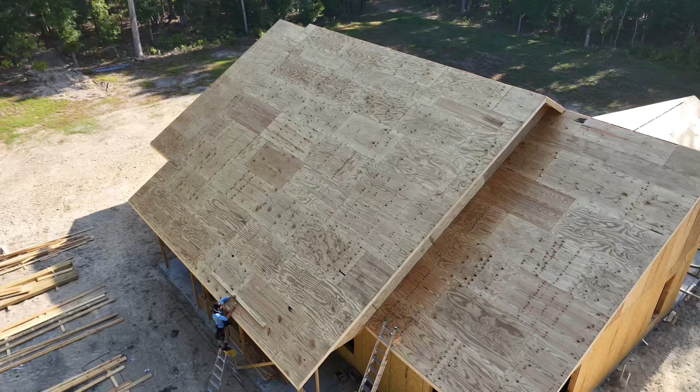So we're framing up this custom home I'm building in High Springs, Florida, and the house is about 3,400 square feet total. And it's a real country style home, which will fit in real well. We're building this house in River Rise subdivision in High Springs. There's a lot of other similarly styled homes in the neighborhood.

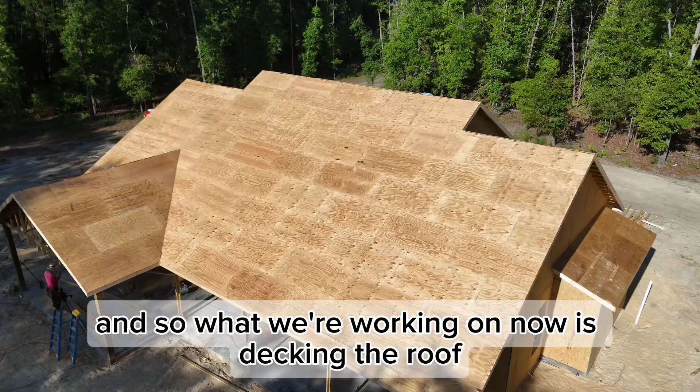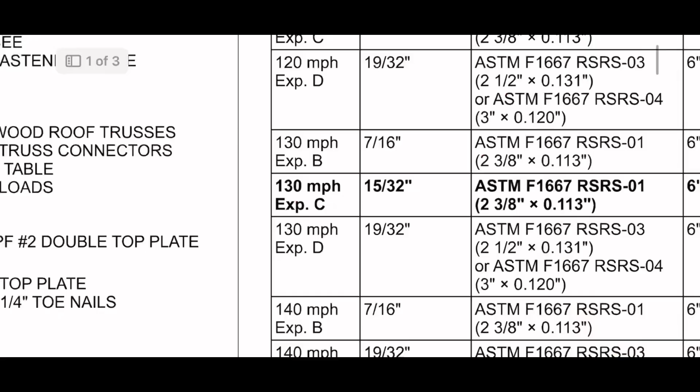And so what we're working on now is decking the roof. We've been working on this for the past 3 or 4 days. And what we used on this house was 19/32 CDX plywood. And per the engineering, the minimum plywood thickness that we needed to use was 15/32. But that's in the 130 mile an hour wind zone and exposure C.

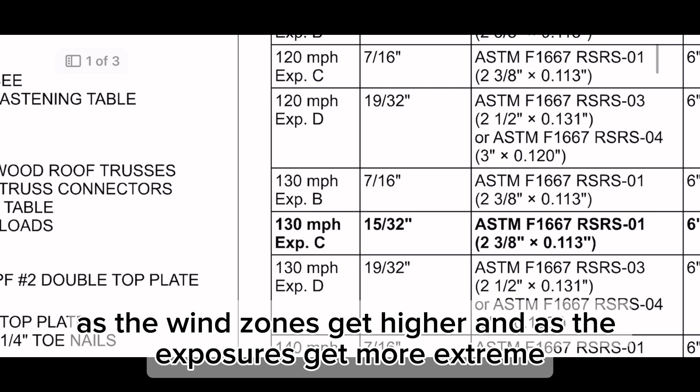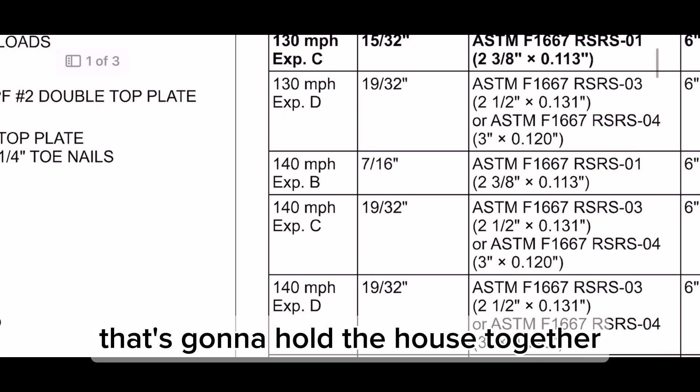But as the wind zones get higher and as the exposures get more extreme, the thickness of plywood is required to be higher. So by going with the 19/32 plywood, we're definitely putting on a stronger roof that's going to hold the house together in extreme weather circumstances. So that's something I started doing about 6 months ago, was doing a minimum of 5/8 plywood on all my houses. And so that's what we're looking at here.

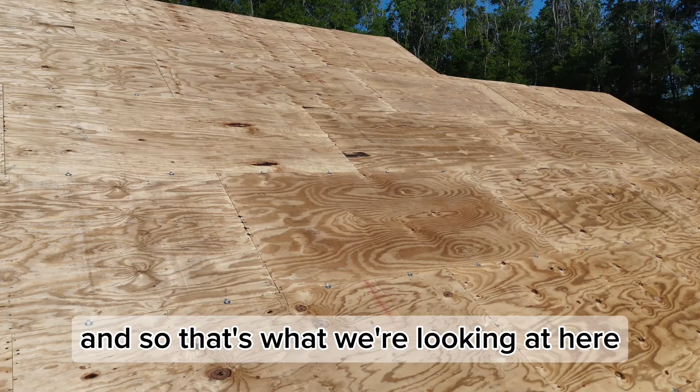And another main reason why I went with the plywood is we're doing metal roofing on this house. And so all the different metal roofing manufacturers have product approvals that tell you what the roof sheathing needs to be that you're putting your metal roofing over the top of. And so most of the metal manufacturers require CDX plywood. So that's a main reason why we did that on this home.

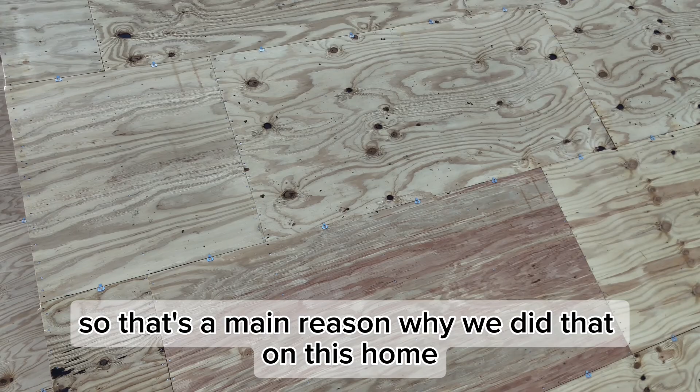And so with the installation of the plywood, the main thing we're looking for is the nailing pattern. So here you can see the nailing pattern of the plywood on the edge of the roof, into the subfascia, which holds together the entire perimeter of the roof. So this is very important.

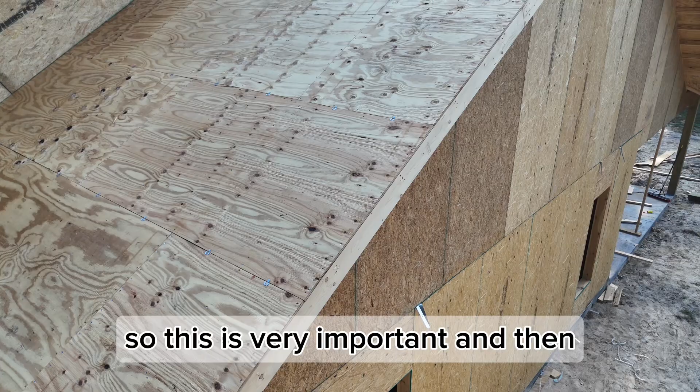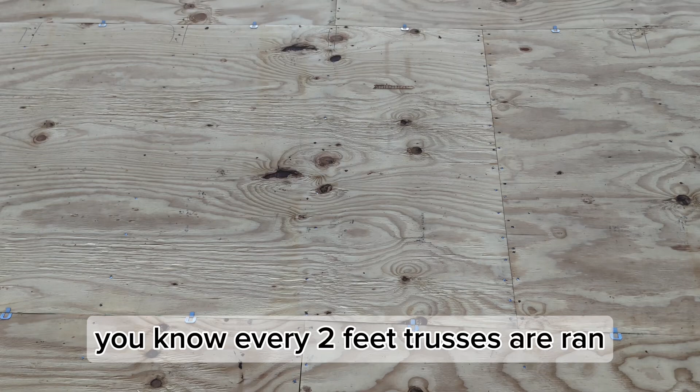And then we'll look at the plywood that falls within the body of the roof. So here we have seams on the edges of the plywood, and then also every 2 feet trusses are ran. So there's going to be a lot of field nailing on the plywood, which is the plywood space that's in between the edges. And so you're going to be looking for both of those.

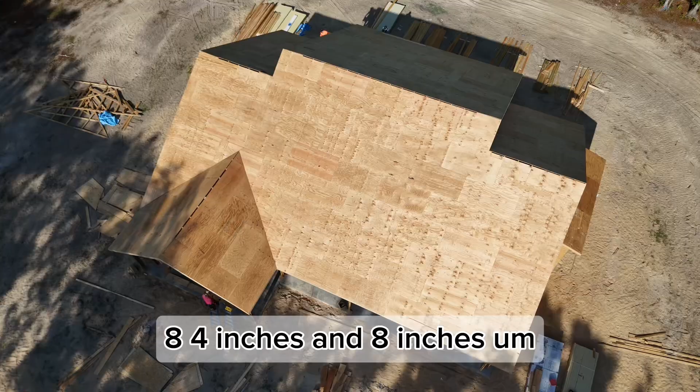So a lot of engineers will call out a different nailing pattern for the edges of the plywood rather than the field. Usually you'll see 3 inches on the edges and then 12 inches in the field, or 3 inches on the edges and 6 inches in the field, or really any combination, 4 inches and 8 inches. And so you'll check for that nailing pattern per the engineering.

And on a roof like this, it's pretty straightforward. You're not very likely to miss spots with nails. It's not a very cut up, complicated roof. So it's a pretty easy roof to inspect for nails.

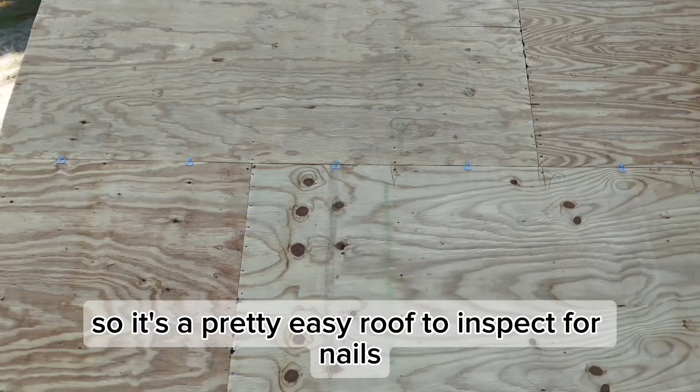And something else to look for at this stage: make sure you have all your H-clips in place. And H-clips are those little metal pieces on the horizontal joints of the plywood. These are to keep the plywood level. So the vertical seams will always land on a truss, so it's very easy to keep the plywood level there. But on the horizontal seam, that's not the case. So you put these little H-clips in and make sure to keep the plywood level.

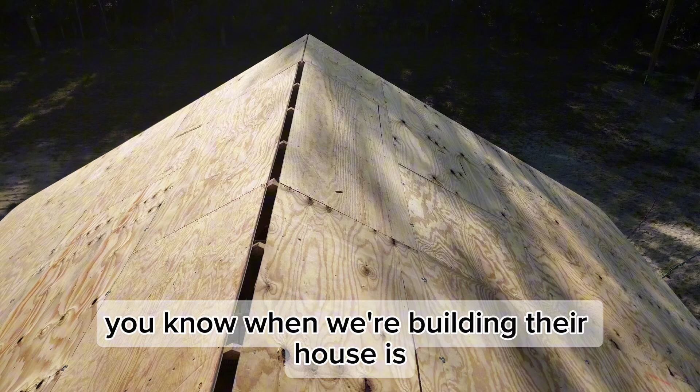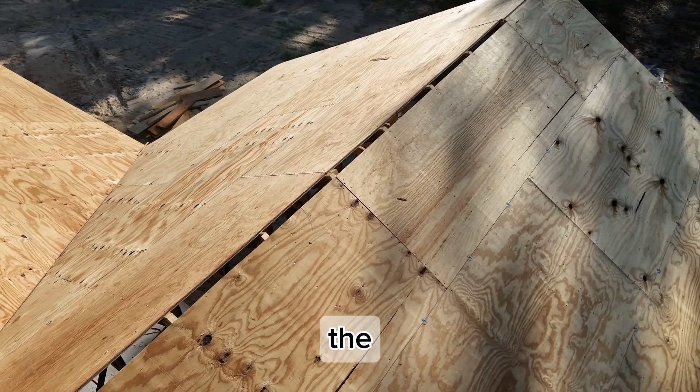And something I get asked about all the time by my clients when we're building their house is, what is that gap at the ridge of the roof? And so what that is, that's where the ridge vent's going to go. And so the state of Florida is going to have venting requirements, unless you do an unvented attic with spray foam insulation. The majority of homes in the state of Florida are going to be vented.

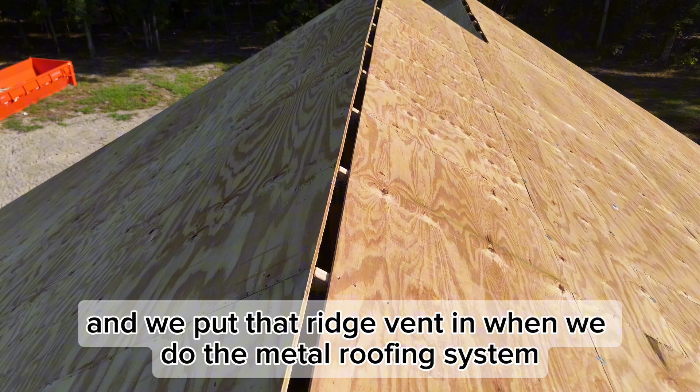So what you do is you put vents in your soffit, and that acts as an intake to bring fresh air in, and then your hot attic air is pushed out of this ridge vent. And we put that ridge vent in when we do the metal roofing system. So definitely a vital part of the structure. And so we're looking at passing this inspection, drying in the house, and then moving forward with trades next week.